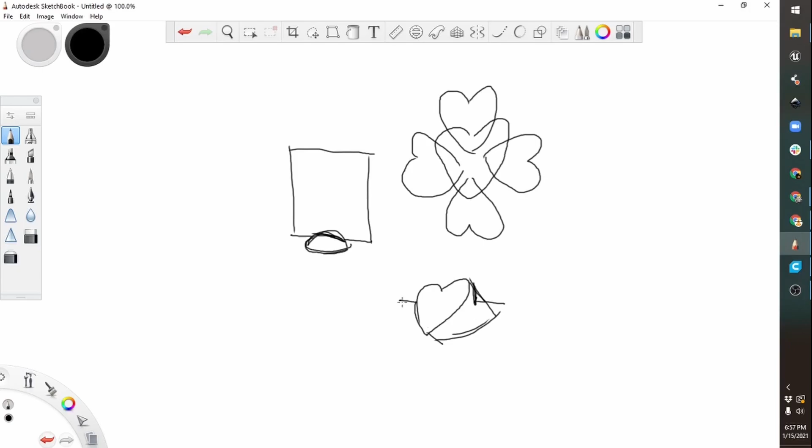So I'll have to add a little bit of complexity in here, and we can make one large central heart that will act as our holder. And if we stand it up, so we have a heart shape standing up out of the ground, we can put our slot in the back here so that we can have our picture or card sticking up and a base around it. And then we can even add ourselves a message in there.

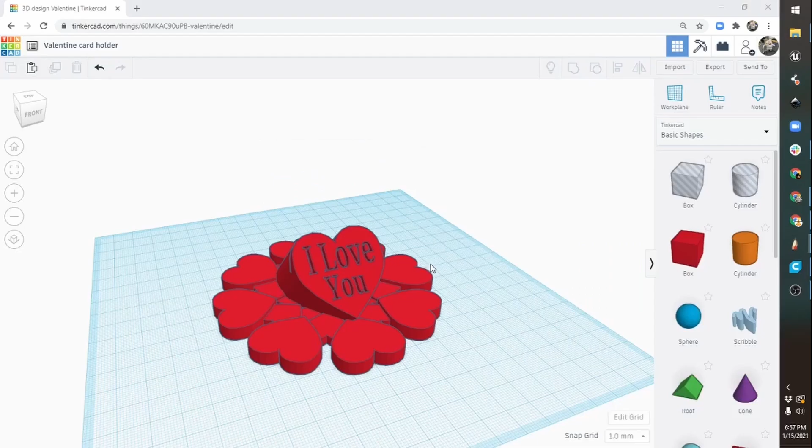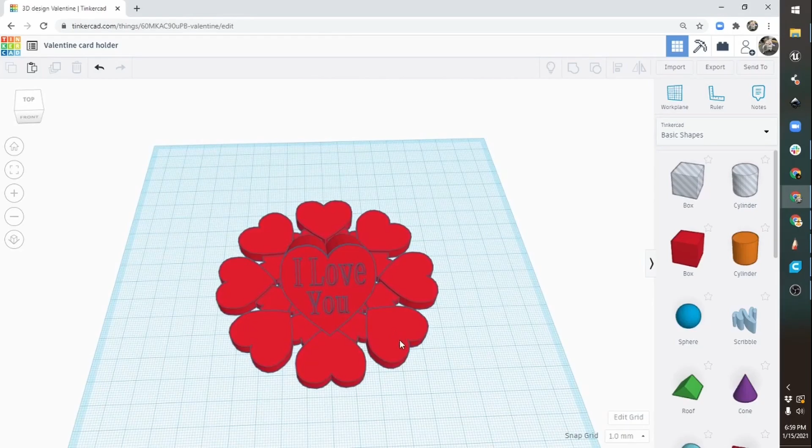Next, I will show you how to design this stand made entirely of hearts. We are going to put together this cheesy Valentine, which will hold up a card or a photo and is made entirely of hearts. Let's get started. I'm going to move our hearts here out of the way, and we're going to start again with a single heart shape.

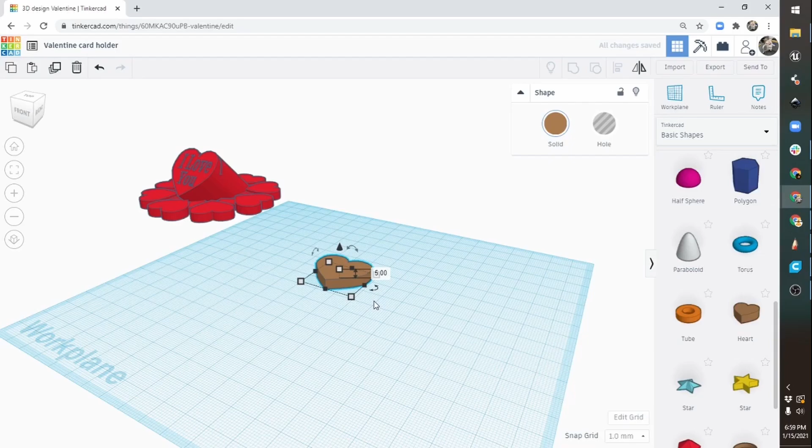So we're going to be making a base that is somewhat circular. I think I want the base to be a little bit thinner than this heart starts out. So we're going to cut this in half. Instead of 10, we'll make it 5. So the thickest part of our base is 5 millimeters, which will be sturdy enough. And let's just change this to red so it looks right. And we'll go ahead and duplicate our heart. And then I'm going back over to the mirror tool on the other side and flipping it up and down.

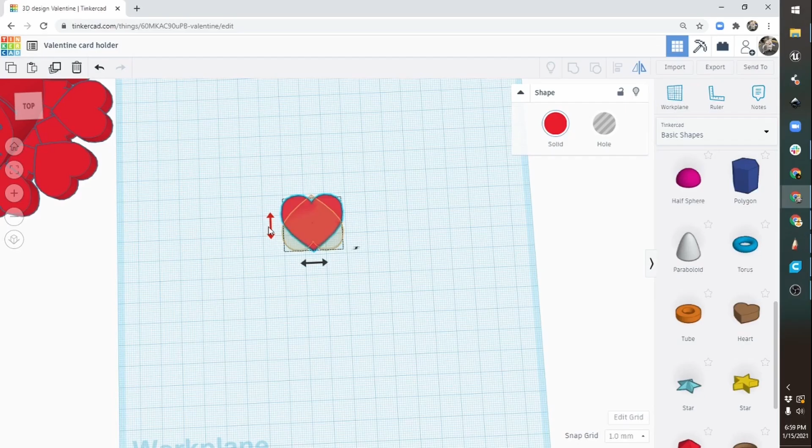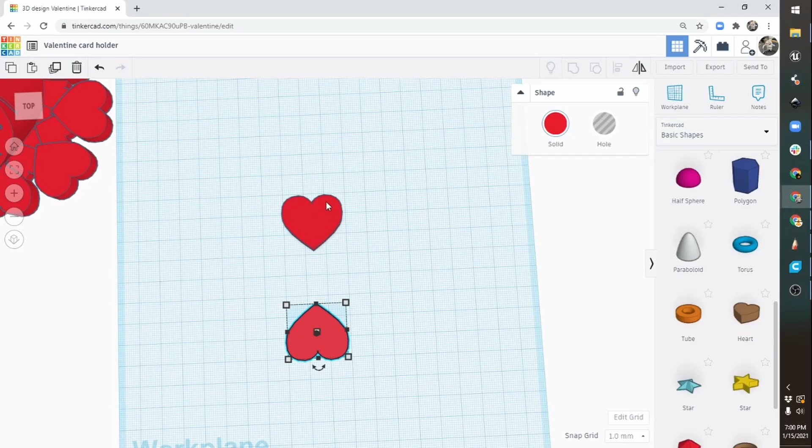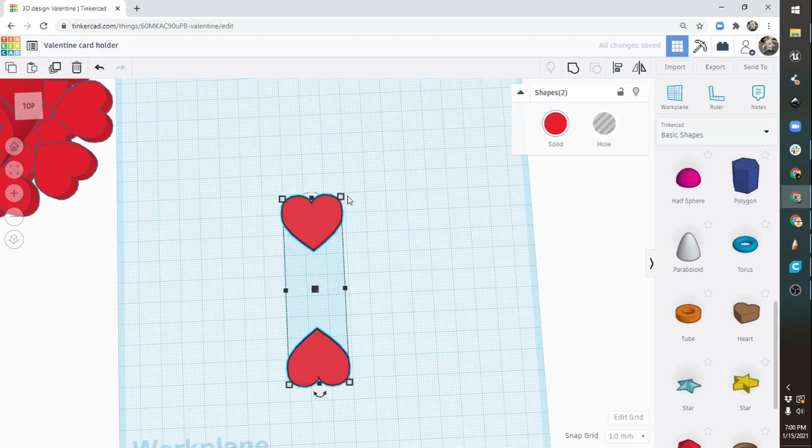Now I'll take my second heart here and I'm going to use the arrow keys to move it down. And I want the base to be 90 millimeters across so that it has a nice wide stand, but it's not too large. So let's select both of these and take a look at their dimensions. So they are 78 millimeters from side to side. That's close enough. I think I'll just move this one down. There we go. And then select this. Now they're 90. All right. This is going to be the maximum distance of my base, which is going to be circular.

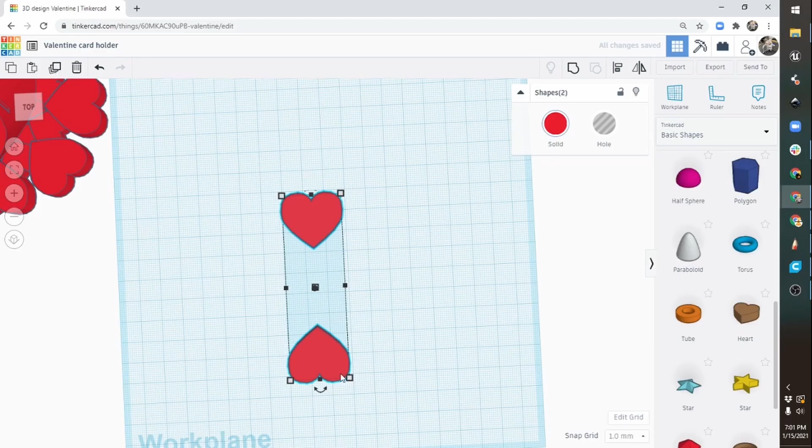So let's make our first circular row of hearts. With both of them selected, I'm going to click duplicate again. And down here, I'm going to click on our rotate tool. And let's see how far we need to rotate so our hearts aren't touching. That way we can actually see the shape of the heart. If we overlap them, they're not going to look too much like hearts. If I go, the very minimum is 45, and it's just barely touching.

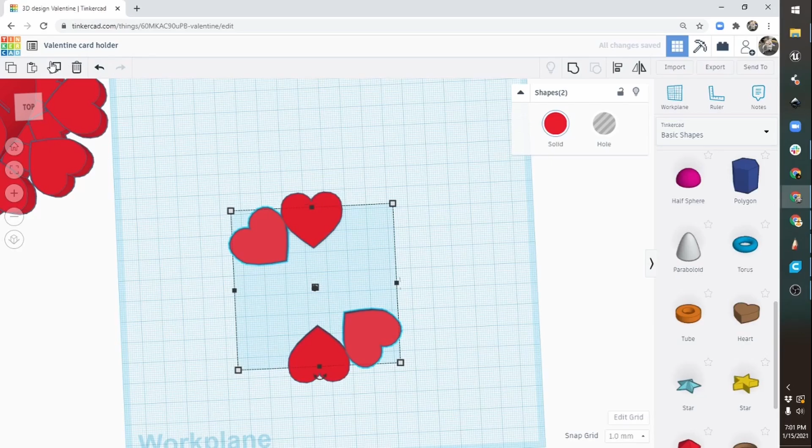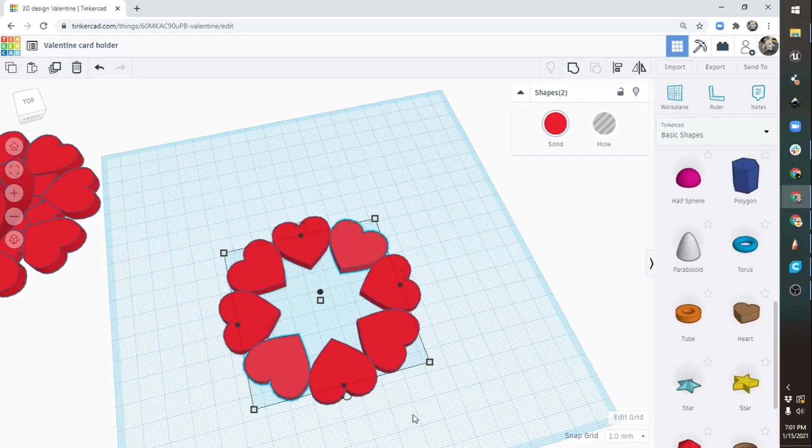Let's try that out. Once I've made my one rotation move, I'm going to click on duplicate and repeat. We're going to get another one and another one. Now we have a circle of hearts all around. They are just barely touching at the edges. So they wouldn't likely hold together very well if we printed them. That's okay. We'll fill our interior area with hearts too, and we'll use our duplicate and repeat trick.

So I'm going to drag a box around my first row of hearts, first circle of hearts here. I'm going to click on duplicate. Just going to make a copy of everything all in the exact same place. Now carefully, I have to hold down Shift and Alt. Shift will make your scaling uniform, so you can't squash your shape. It will scale down in all directions at once. And holding down Alt will make it scale down from the center.

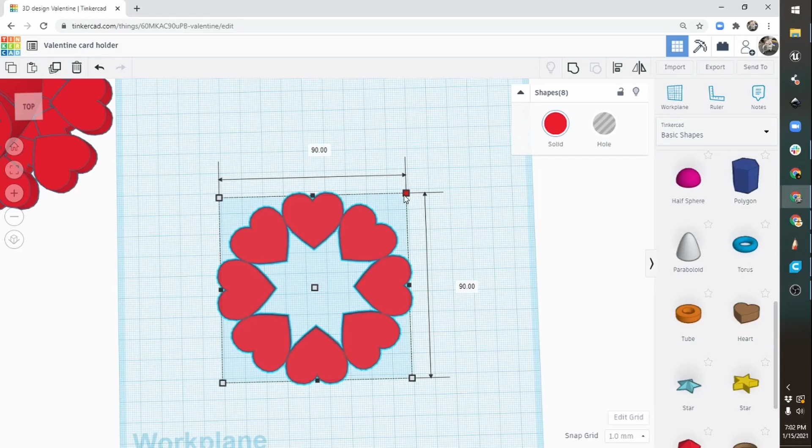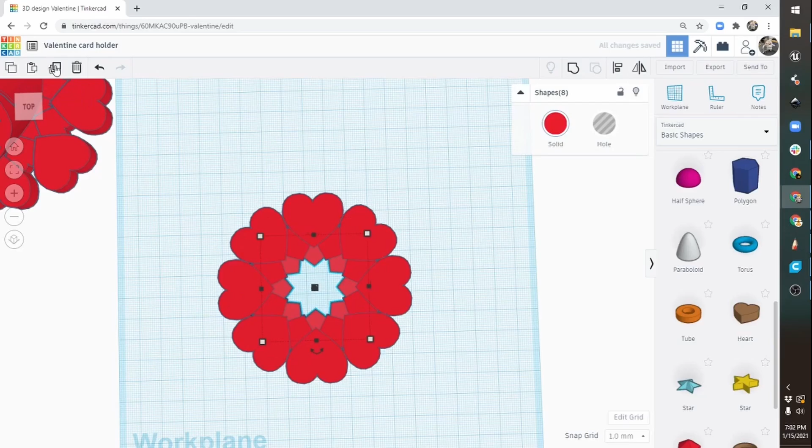So now I can move my hearts down so that they are sticking out into the middle a bit. Not too much. Then I'll go to my rotate handle and we'll rotate these one notch over so that they look a little different. Now I've done two different moves. I've scaled it in and I've rotated it. And if I click on duplicate and repeat, it's going to scale them in and rotate them again.

We use this trick to make a very, very finely detailed center to this, but I don't want to do that since I'm going to add a large shape in the middle here. I think this is enough. 2 rows is enough to solidify our shape, and we'll get some nice little nifty details on the inside there.

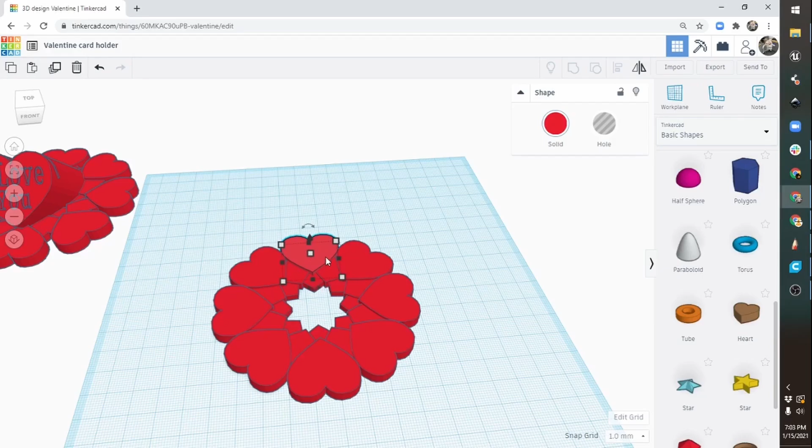I'm going to click an empty space to stop remembering my repeats for duplicate and repeat. I'll click on another heart here, and we'll go ahead and duplicate that. I'm just going to use my arrow keys to move it down into the center.

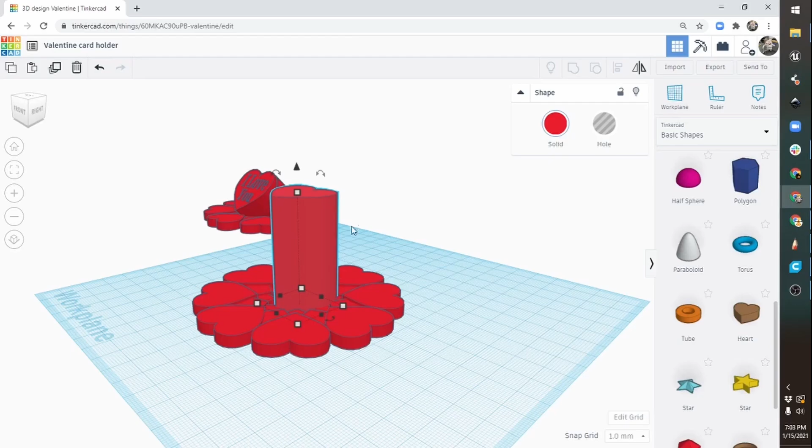Then we are going to make this thing rather tall. I don't actually care exactly how tall it is, because I want to tilt it over, I'm going to cut off the bottom side, however much goes outside of my Workplane. So let's go ahead and make this a little bit bigger too. I think we need more space to put a message on it.

I'll hold down Shift and stretch this whole thing out a bit. And look at that. Looks like I should have held down Alt to keep that in the center. So I'm going to go ahead and undo that. Shift, Alt, and drag one of these out.

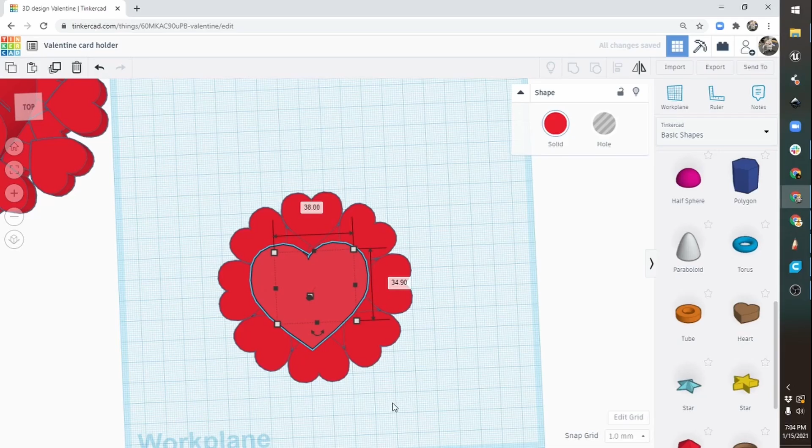Now we have a bigger heart in the center, but it's much too tall. So let's go ahead and grab our up and down handle and move it down into the floor. And then we will rotate so we are 45 degrees. So we have our heart sticking out at 45 degrees.

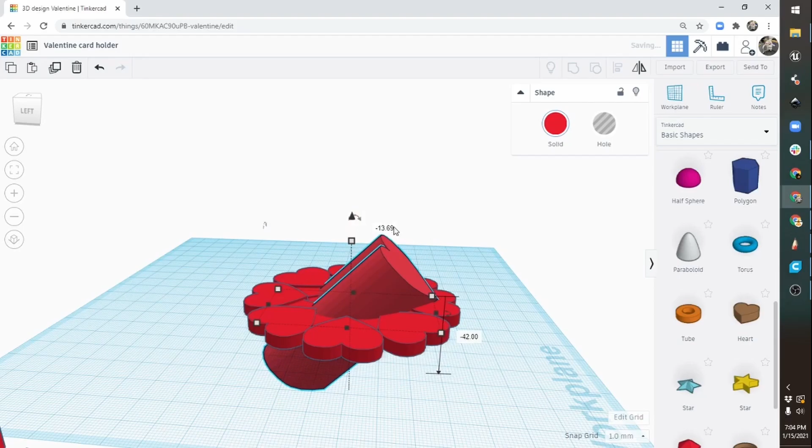There'll be an easily readable message from above. And we can drag our up and down handle to get it further down. We just want to be able to see the shape of the heart.

And we want this to be a little bit in the middle. So because we've made this long shape, we know that this is going to go all the way down to the ground. If I made this too short, we might have a gap behind it, which I don't want. I'm going to use my arrow keys to just nudge this back.

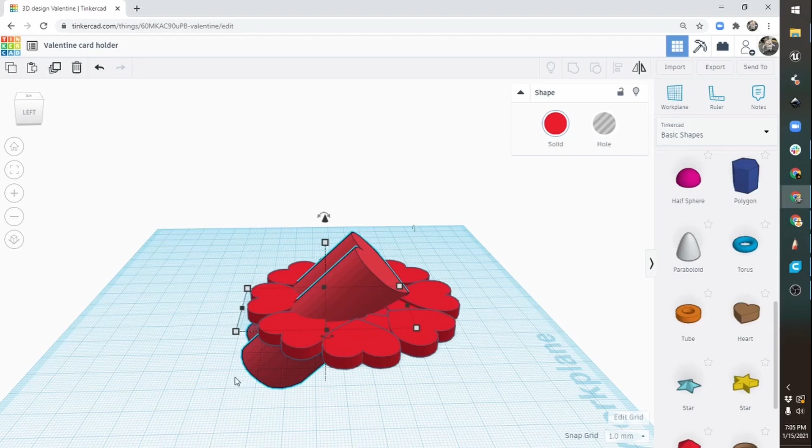We can't use the align tool to center it, because the center of this shape is not actually where we want it to be. We're going to ignore the part that goes under the ground. And line this up however we like so that it looks good. And we've got our canvas there for our message.

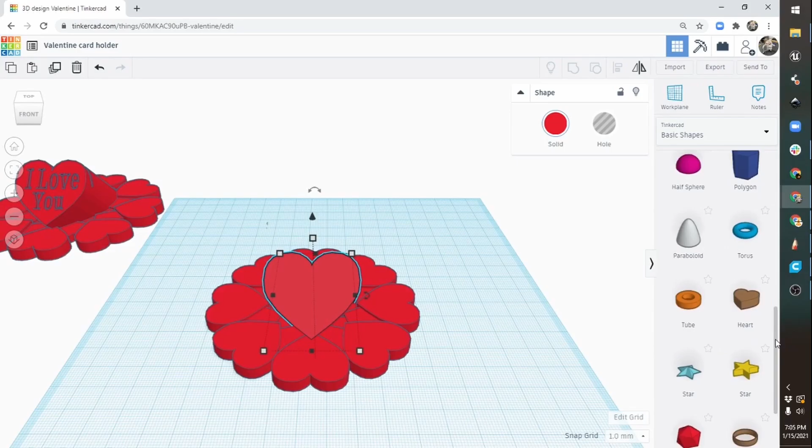And we have a little bit of a problem. If I grab the text, put it out here, I'm going to have to lift it up and rotate it and try to nudge it into the face of this in order to cut out my message. Now I could have done this to my original heart before scaling it up and rotating it into place.

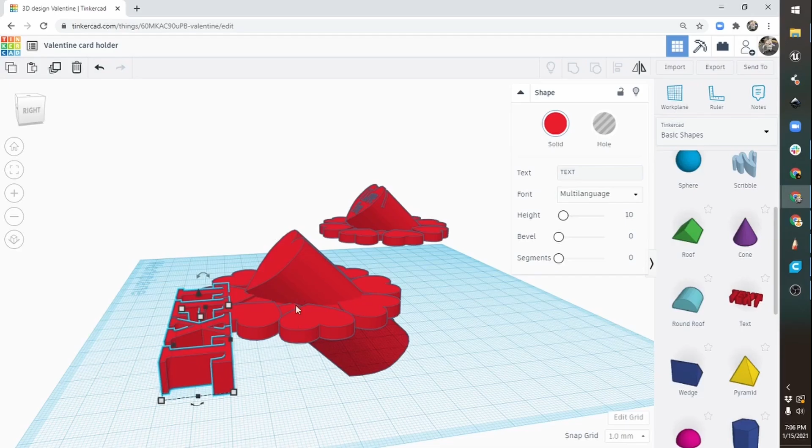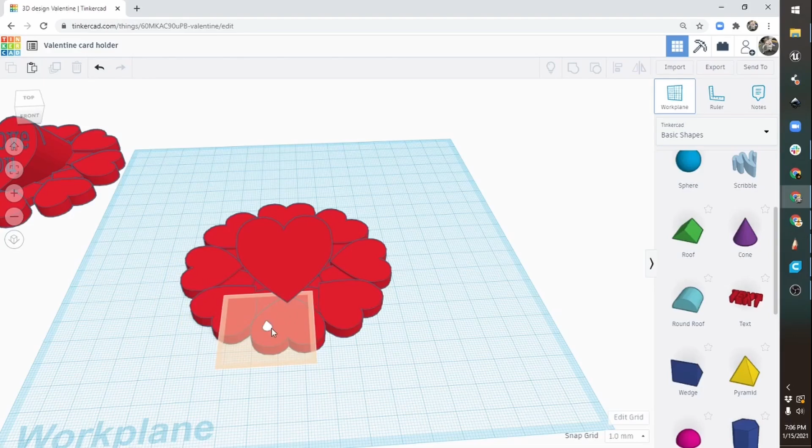That's a possibility. But since this is a simple project, let's take a look at the work plane tool. If we drag this work plane out, you can see this little cone with a blue square around it, and every object that I touch, it becomes orange and it moves to line up with that surface.

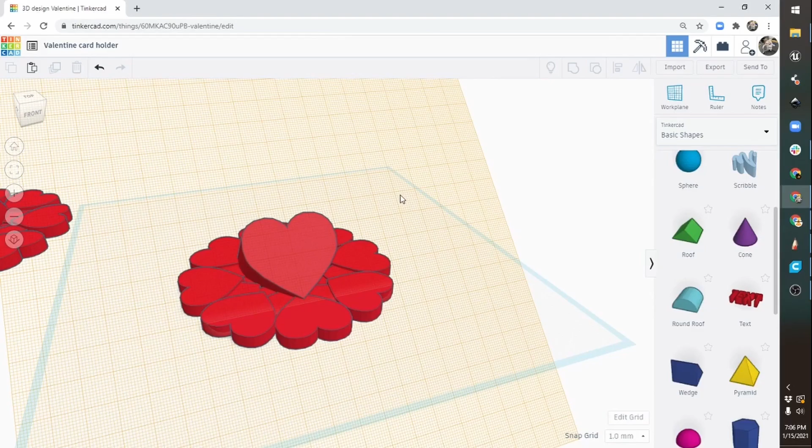So let's drop it right on the surface of the heart. Now our blue grid disappears and an orange grid shows up, and that grid is lined up with the surface that we placed it on. Now that this is the new work plane, everything I drag out will be lined up with the work plane and right exactly where we want it to be.

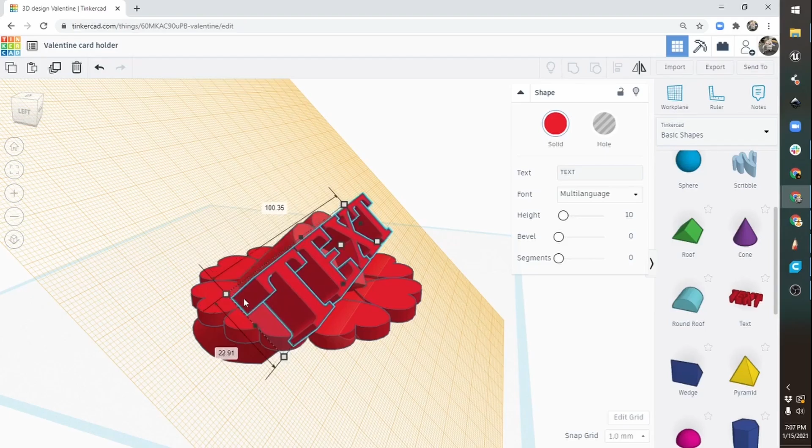You can see that Tinkercad keeps all of its handles lined up with the work plane. So because I have this tilted, all of these handles are tilted as well, and I can change the shape the way that I want it to.

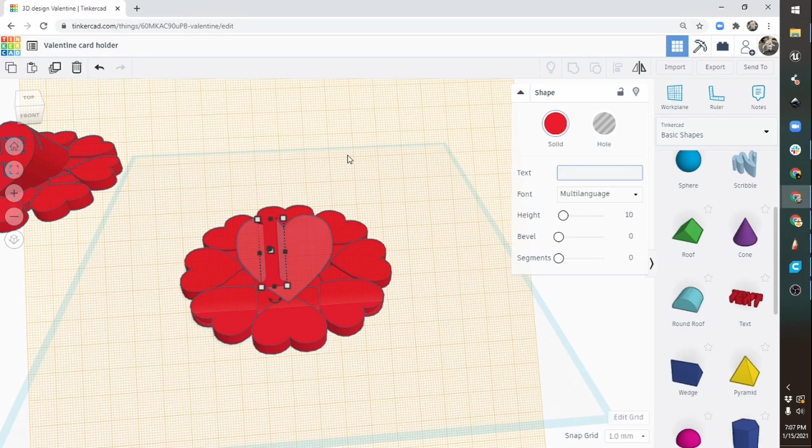So let's go ahead and give ourselves a message. This time, it's just going to be, let's make that capital, LOL. I'm going to click on Hole here so that I can use this to cut out my letters rather than having them stick up from the surface. And we'll change their size and stretch them to fit inside of our heart area.

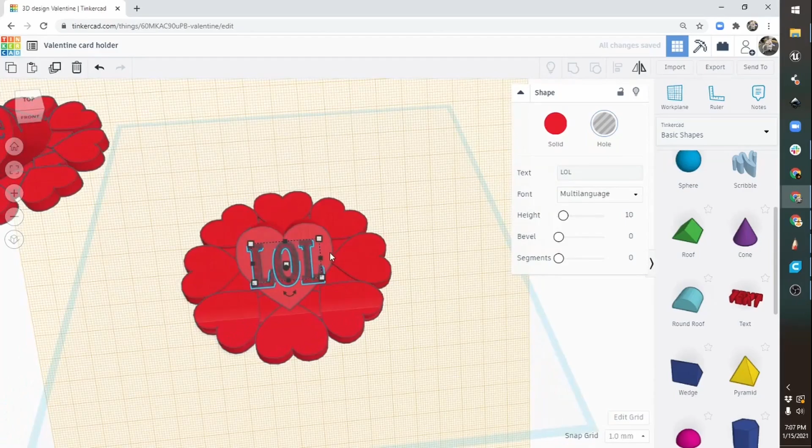Once we get our message ready, we like how it looks. Remember that this surface is on the top, so I need my hole to cut into the surface of our heart. So we're going to look at this from the side, and we can see our up and down arrow is still lined up with this work plane.

So I can move it away from the heart or towards the heart. And I want to go down until it's -2 or -3, just enough to cut the lines in there.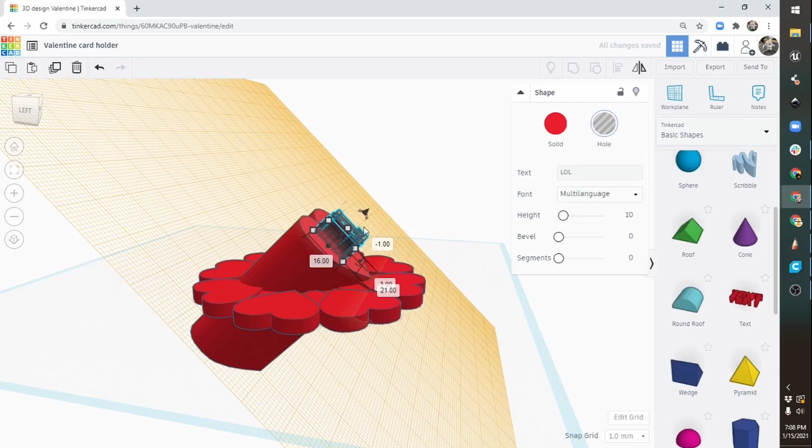We'll go to -3, that's 3 millimeters in. That is going to cut that shape.

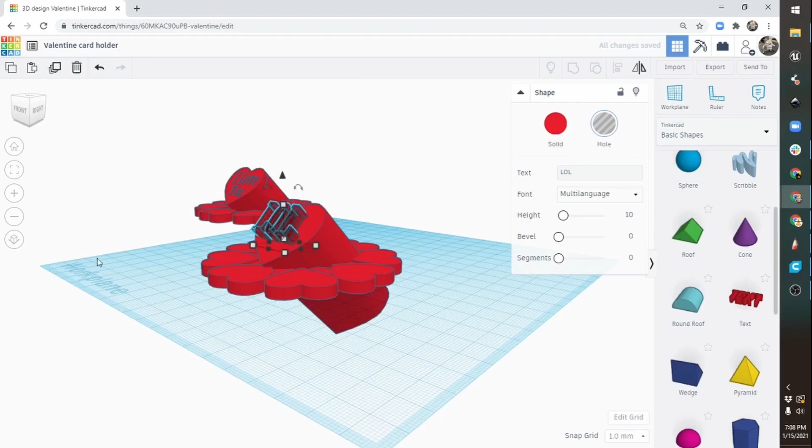Now that I have my design ready, I'm going to put the work plane back where it belongs. If I click on work plane and drag it to an empty space, you can see the orange rectangle turn right back into the blue work plane.

Since this is the floor I want to plan for, I'm going to make a new hole. Let's go up to the top, grab this box that's already set to hole, and make it as big as our design. I'm going to use this to get rid of the part that sticks out under the floor.

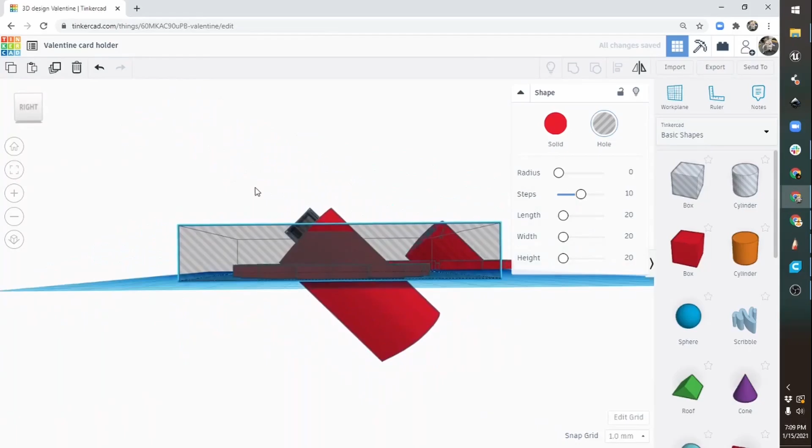Let's grab our height handle where we can make this thing taller, and we'll go all the way down past the floor as far as we want. Make sure that our box hole highlights the entire area that is underneath.

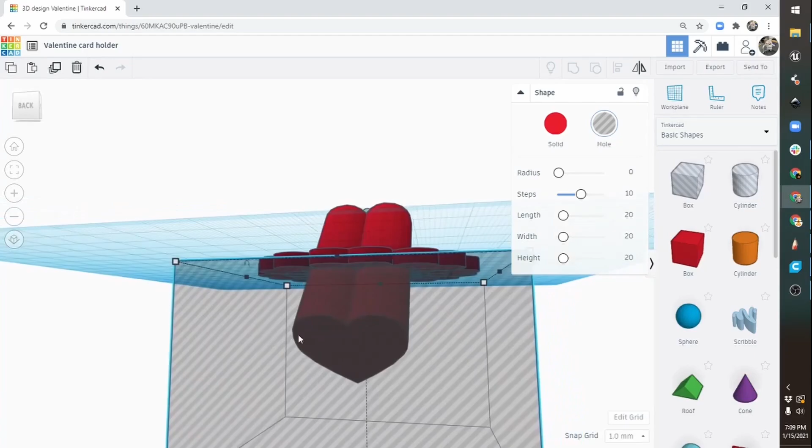Now we can go ahead, click on an empty space, drag it around our design, and click on Group.

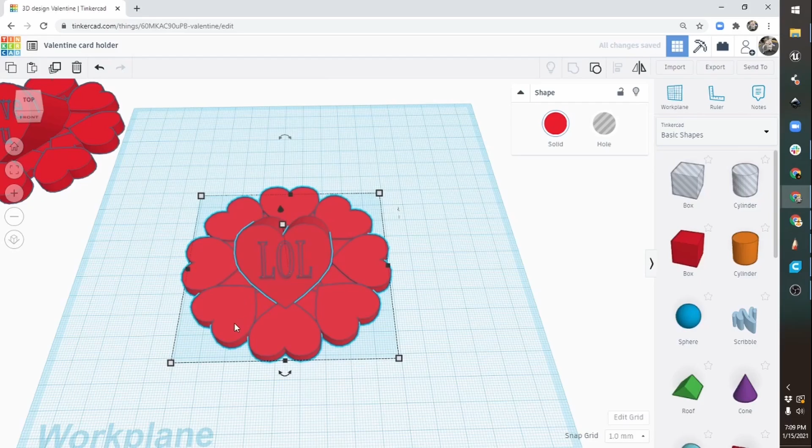Now that we have cut the holes out of everything, as we added the solids together, we've got our letters cut into the surface of our heart, and we've got the bottom, which is perfectly flat.

So far so good. Now we have a little stand with a ridiculous message on it. But if we want to make this into a stand for a card or photo, we're going to need to cut one more hole in it.

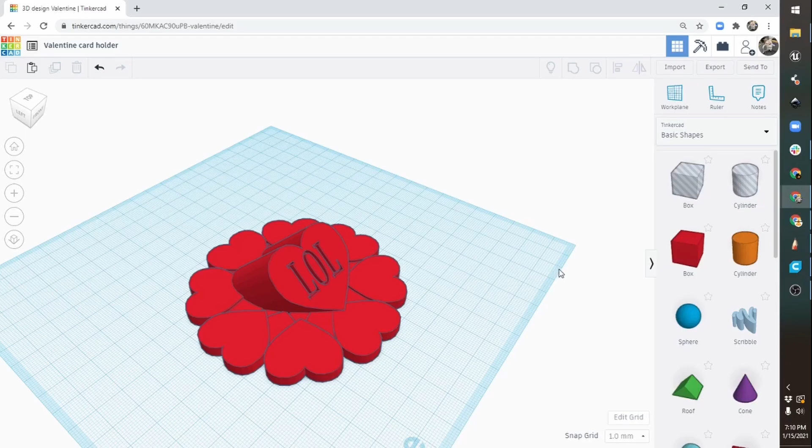So let's take out a box. We need this box to be the width of the object that we're going to put in here. If we're thinking of a paper card or a photo, we can just go with 2 millimeters.

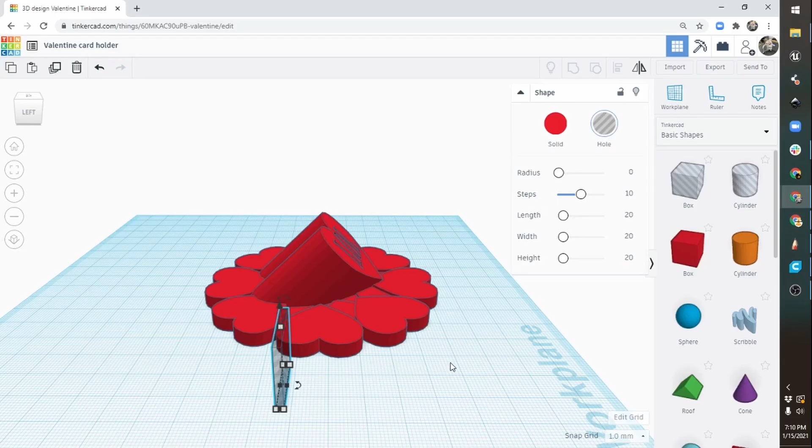If you have done our lithophane project and printed a lithophane, it's going to have a thickness that you set up during slicing. Our default settings were 3 millimeters, meaning the thickest part is 3 millimeters and the lighter parts are thinner. So you're going to need a hole that's at least 3 millimeters wide so you can fit your lithophane in there.

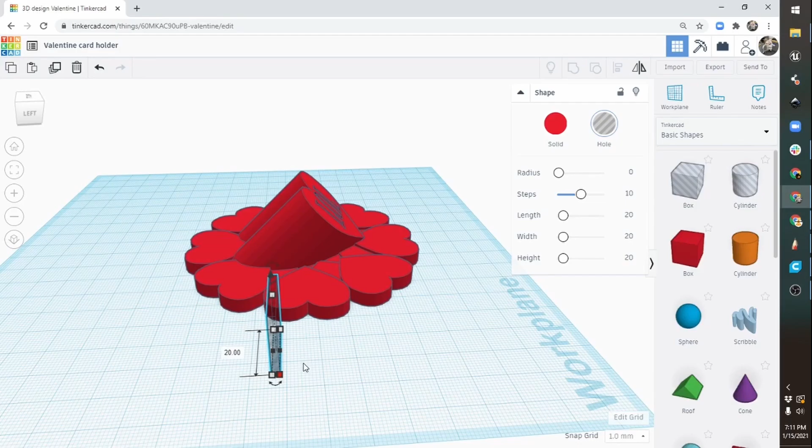There we go, let's do this and make it 3. And we're going to need this hole to be a bit longer. Whoops. Stay at 3, there we go.

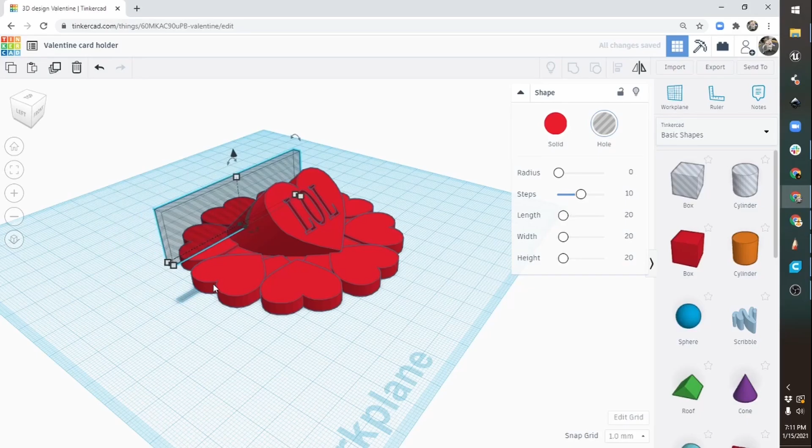And we're going to need to raise it up. So let's move with the arrow keys and just nudge it around. We don't want to cut out part of the front of the heart, so we'll make sure we go back just enough that we can see the shape of the heart.

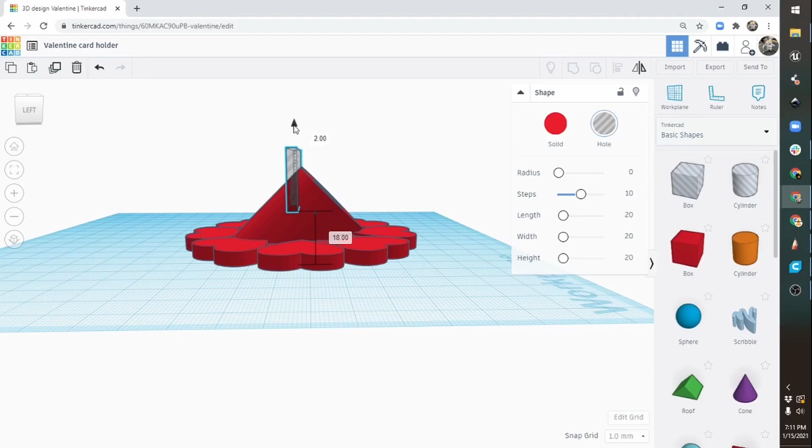Maybe not quite that deep. Raise this up. And lastly, we can tilt this back just a little bit so that our picture or card will stand tilted a little bit away from the message. I'm just going to rotate this—it doesn't matter too much, just so that it tilts back and won't accidentally bend folding over forward.

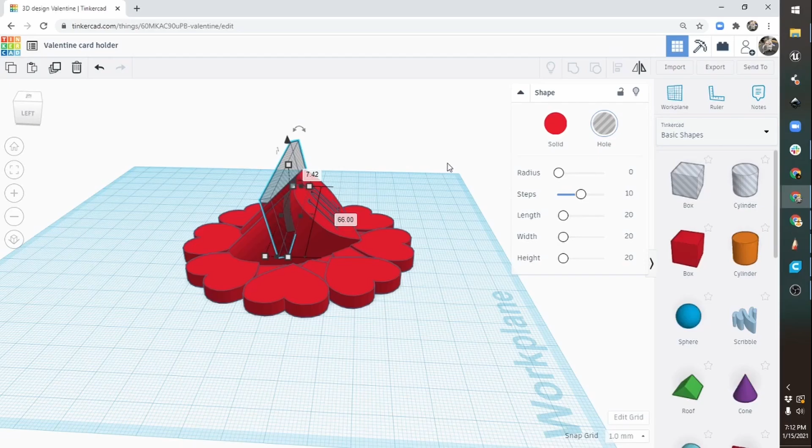All right, now we'll group our design with our final cut. And we have a notch in the top of the heart that's wide enough to fit the object that we want to set in it.

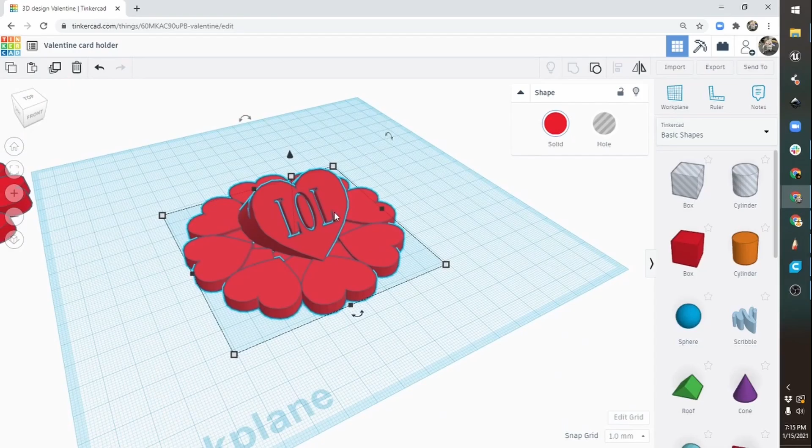Next, we'll set this up for slicing. Let's double check to make sure that the bottom of our design is flat. And click on export—we'll export only the selected shape as an STL file.

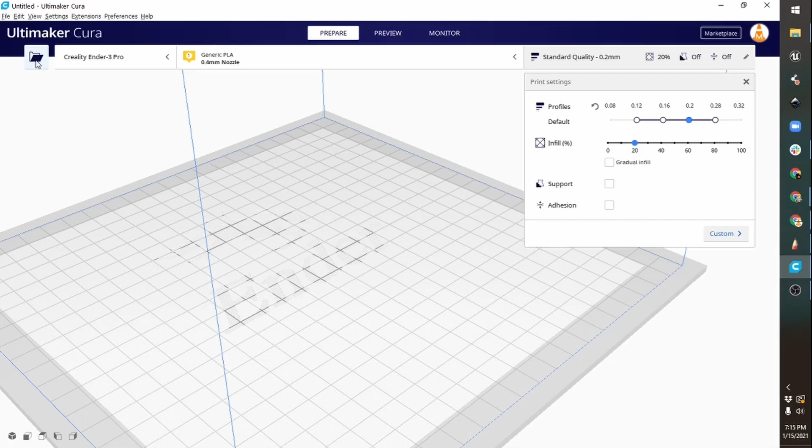Then we'll head over to Cura to slice it. Now, if we designed this correctly, we should not need anything special. Take a look at this, and all of our lines face upward. We don't have any red marks on any of our surfaces because they aren't overhanging.

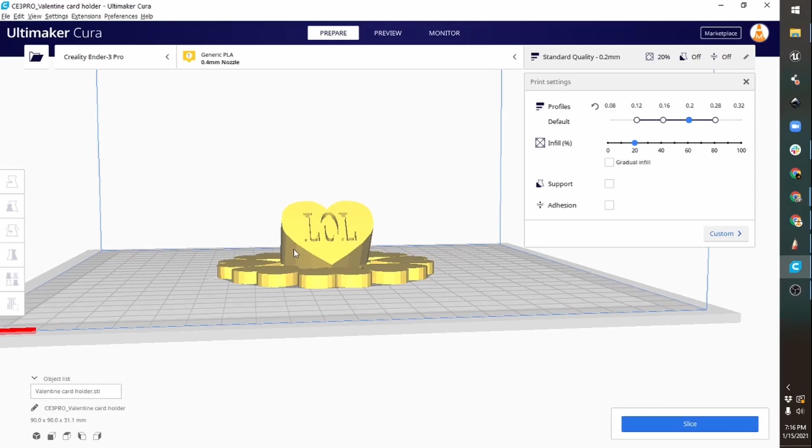So because our upward facing things go up at an angle, they're all self-supporting. The bottom is completely blue since we've cut it perfectly flat to the floor. So we don't need any supports, and we can go for a standard resolution and 20% infill.

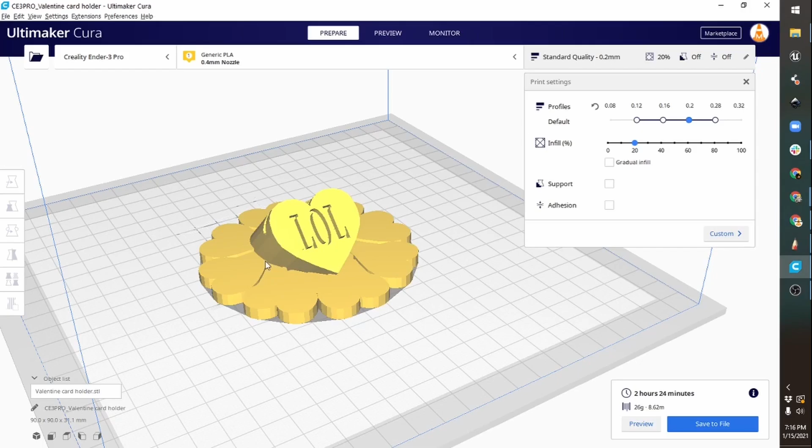Slice away. At nearly 90 millimeters across, still a pretty big print, so it's still going to take some time. But let's click on preview just to double check.

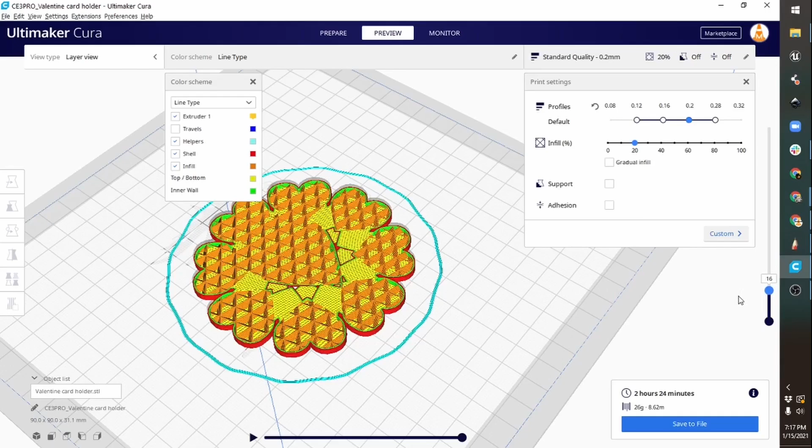See that our inner shapes—if I turn on our line type, you can see our infill, and all of our pieces are joined together. There's a couple of interesting shaped holes here in the base, but nothing that is going to cause anything to fall apart.

So let's save our G-code file, and we're ready to upload. See you next time.